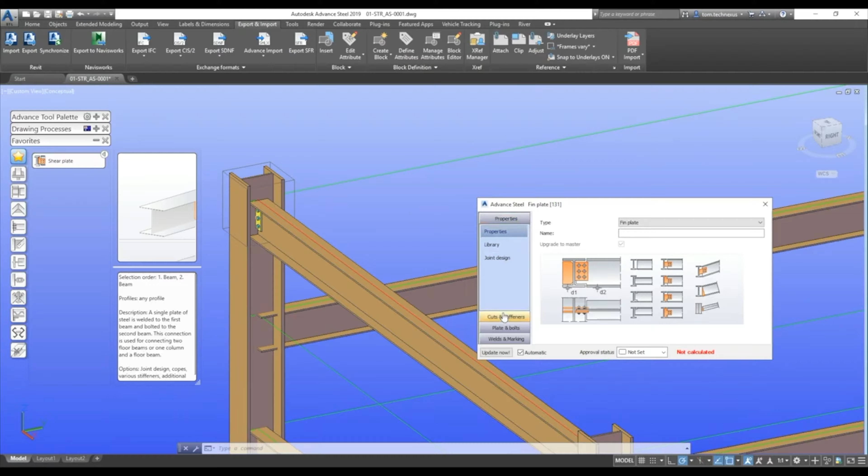Last week we went through the whole routine of uploading a Plant 3D project into the new Autodesk Construction Cloud, or ACC.

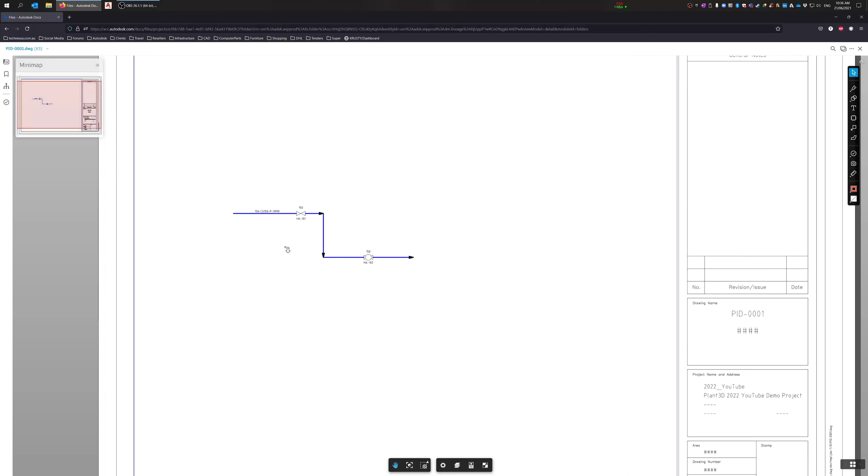I've mocked up a quick little P&ID, and I wanted to go through some of the markup and issue creation features here on ACC, and also the compare tool, up at the top right. All of these tools were available in BIM 360, and now with ACC the symbols have changed a little bit, and how things run have changed a bit as well. So I thought it might be a good idea to get into those.

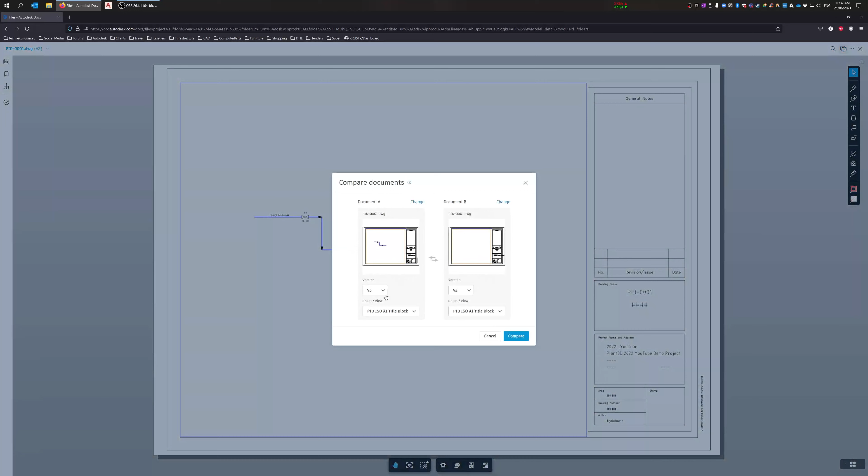So we're at V3 of this P&ID, and you can see I've just added a few bits and pieces. If I wanted to do a comparison of V3 against another version, I can come to the top right and click the Compare Documents button, and then we get V3 versus V2. We might do that within the sheet view.

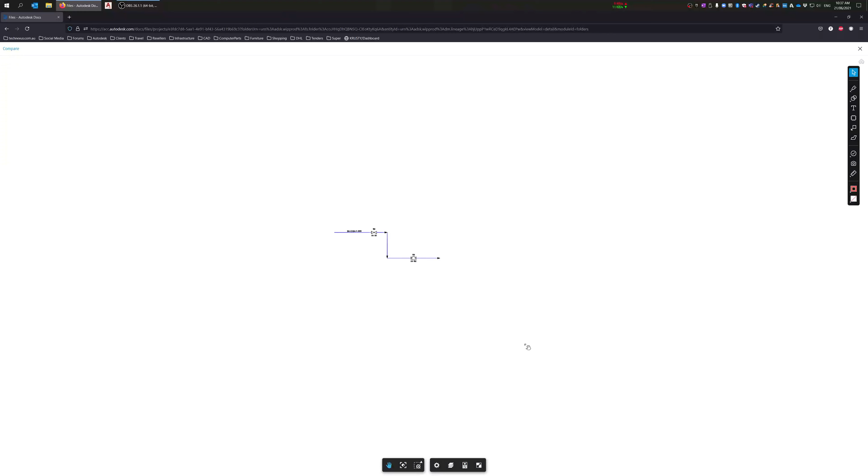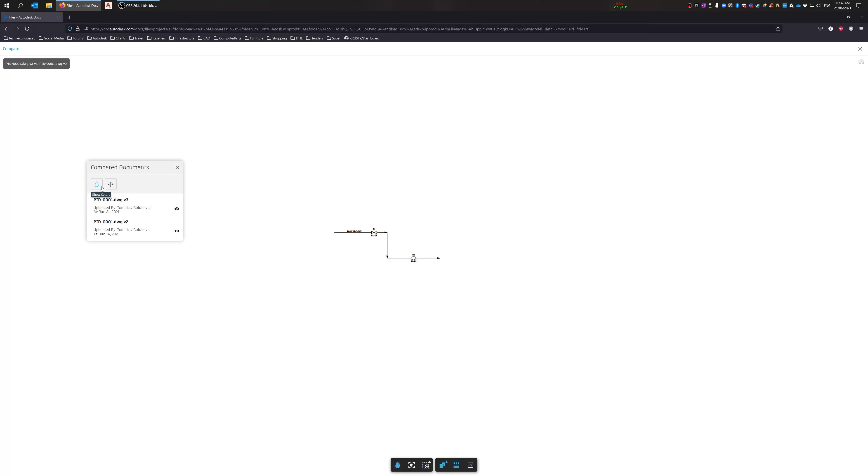It comes up and says that V3 has those lines drawn, and I can turn those on or off, and V2 doesn't have anything underneath either. I can also align, though there's probably nothing to align it against, but we've got hide colors, show colors, and alignment, so it'll compare V2 to V3 or V3 to V2, whichever way you want to call it. We've also got overlay, and side by side.

That gives you a slider bar to show V3 on the left and V2 on the right. This will be particularly handy if you're comparing files that have a lot more work in them. It's something we can go through over the coming weeks.

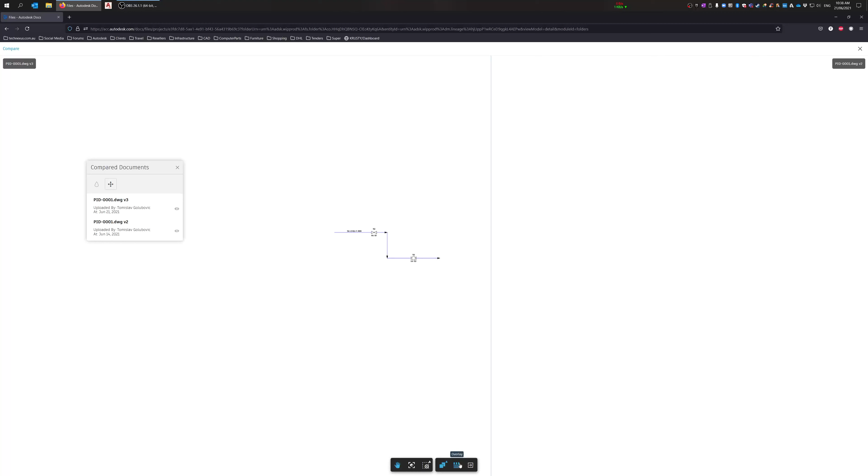I can add some more information to this P&ID and then show you that feature. And down the bottom we've got pan, fit to view, zoom window, or just zoom, side by side, overlay, close the panel, open the panel, and then exit that feature. So if you're doing a lot of day-to-day updates on these files, that compare feature might be good for you.

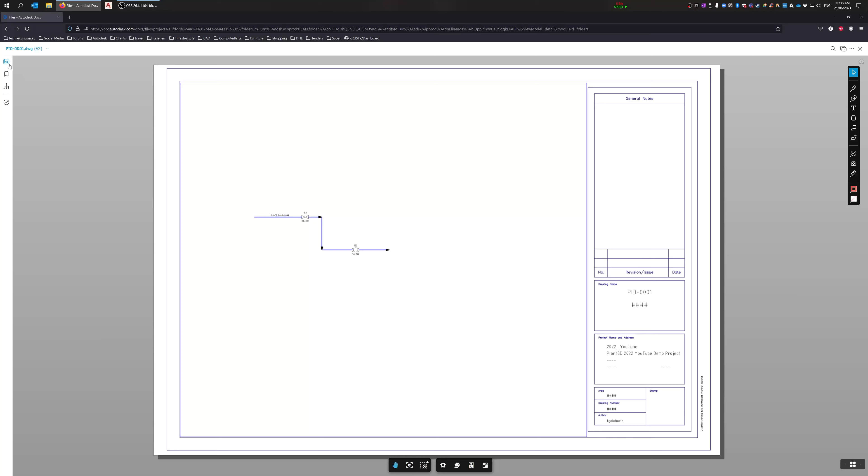Having a look down the right hand side here, you've got the selection tool, just to pick items. What I might do is jump into the actual model space, and then you can see what it is. If I pick that line there and go to properties, you can see that it is an SLine from Plant 3D or P&ID.

It's in CS150 spec, size 6-inch, and it's a primary line segment and new. It will be interesting to see - I haven't tried it yet - whether there's any custom properties come through here. We might do that in another exercise as well.

The pen mode - if I just start drafting something, I can come back later and edit it, and then get the border color, change the color, change the thickness of the line.

Links - it looks like we can only link files within the ACC project. It doesn't look like you can link hyperlinks, but you can link other files, so it could be handy.

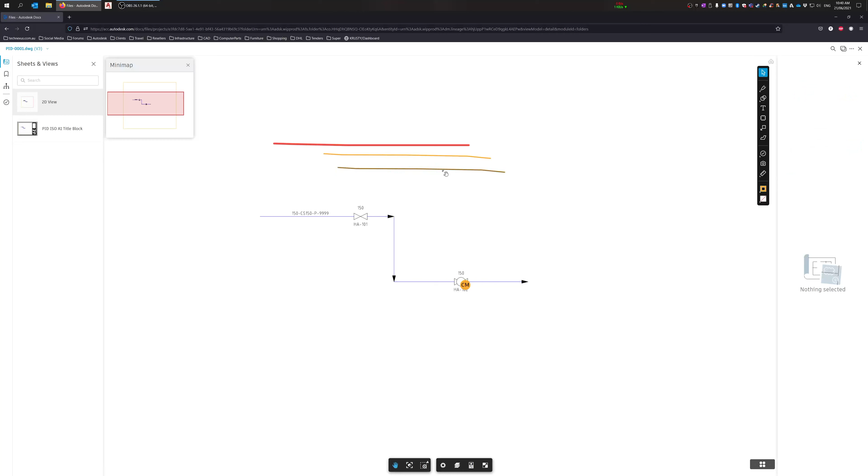What else have we got here? Nothing else, so I can copy it. I can publish it as a markup. For the time being it's unpublished, so no one else will see it, I'm assuming. If I had others on this project, it looks like they'd be able to see it. It looks like when I change from publish, it changes the color slightly as well.

If we want to get rid of those, I can just come up to the right hand side and delete those markups there as well. Same thing, I did an issue before, so we can just come up here and delete the issue.

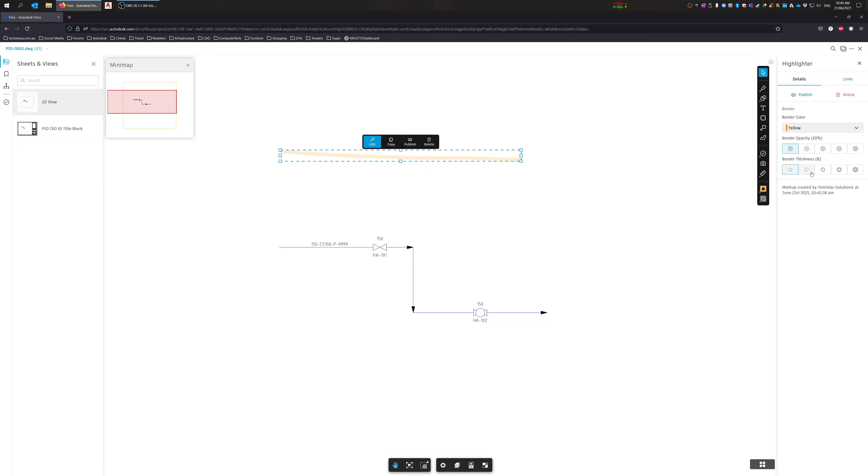We've also got highlighter mode, same deal as the pen. Doesn't look like there's much difference. We can come through and change the border thickness - it looks like it's a bit thicker as a highlighter, so the thin weight still looks quite thick. And then border color and opacity. So you've got pen and highlighters there.

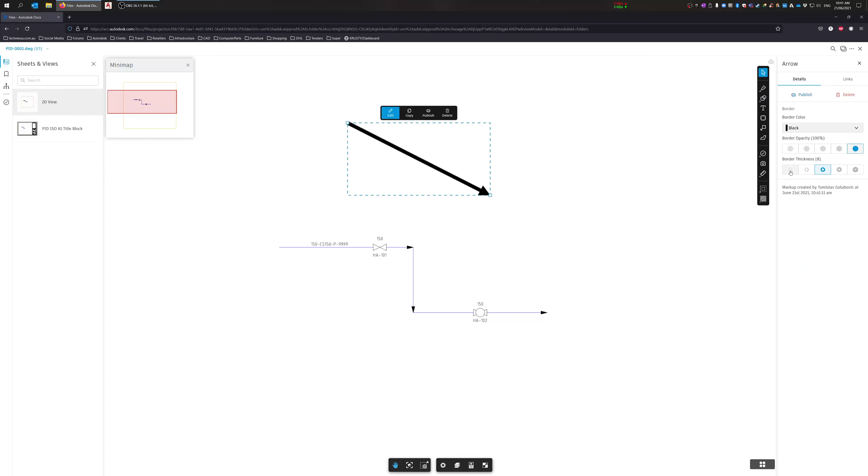Different shapes - we've got the arrowhead, going from the tail to the head itself, and you can adjust certain settings here. If you need to do just straight lines, circle, polygon, four-sided polygons, a square, and a cross.

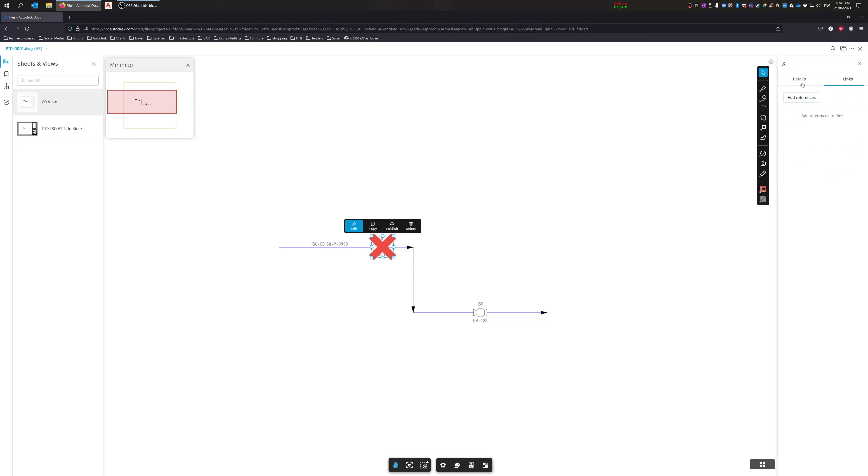So if you want to cross out that valve, we can come through and say it needs to be crossed out, and add any other links to it. So they're just shapes. Then we've got text - add text in draw, so here's your text, say 'remove gate valve'.

Change the font size to be a bit smaller, border color red.

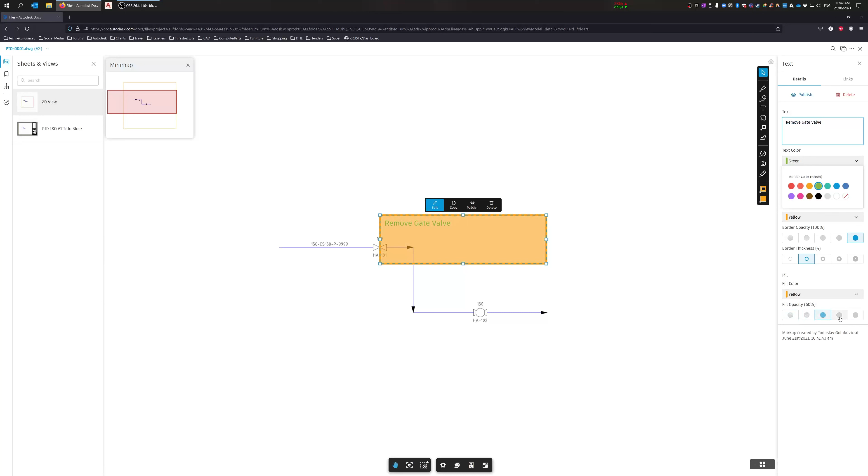Okay, so you've got text color in one color and then border color in another, border thickness, and any other fill colors as well. And the opacity: 20, 40, 60, 80, and 100.

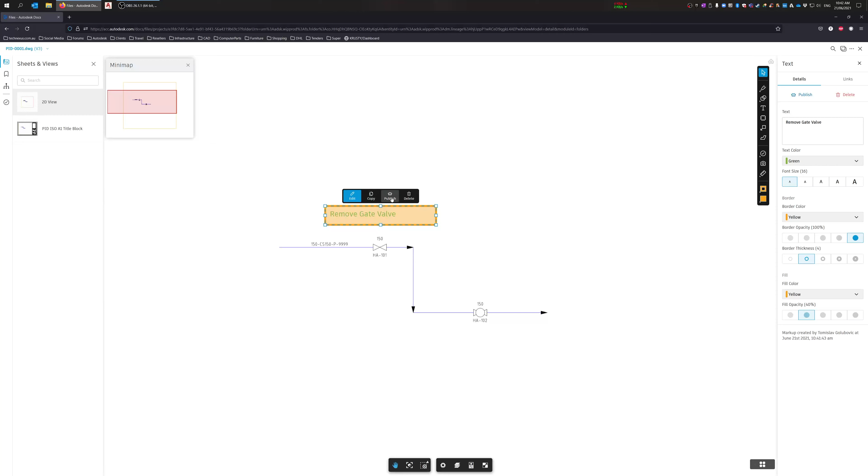So if it's something you want to do, you can come through and just throw in bits of text there. You can copy it as well, publish it, and delete it. So we'll delete that. Revision clouds, or markup clouds maybe.

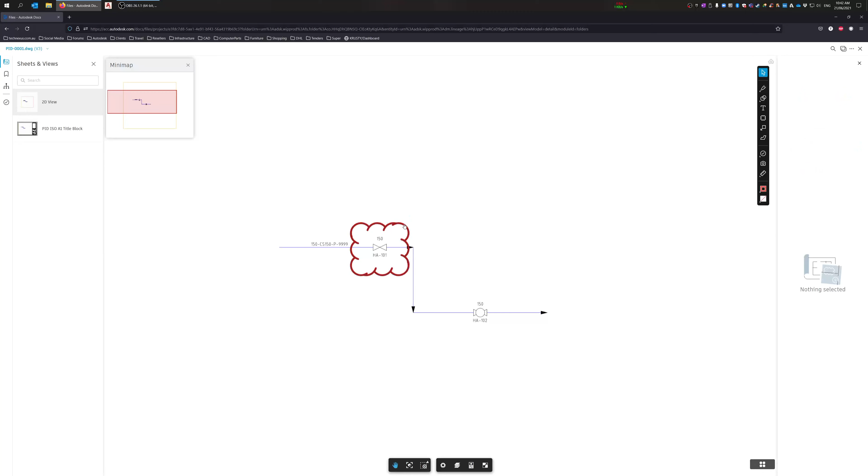So we'll just say no fill, and again copy it or publish it. So if it's published, I don't have anyone else on this project, but I'm assuming if it's published, it means that it's going to be seen by everyone on the project. We can come back and delete that as well.

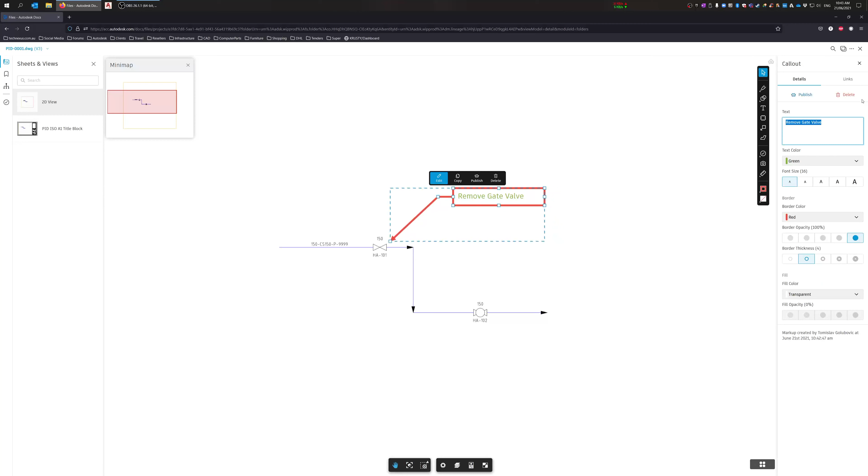So little sort of call outs, that way you have the arrowhead plus the box in there. So again, same thing, remove. Gate valve. Change the font size a little bit. Again, link it back to another file. Delete it.

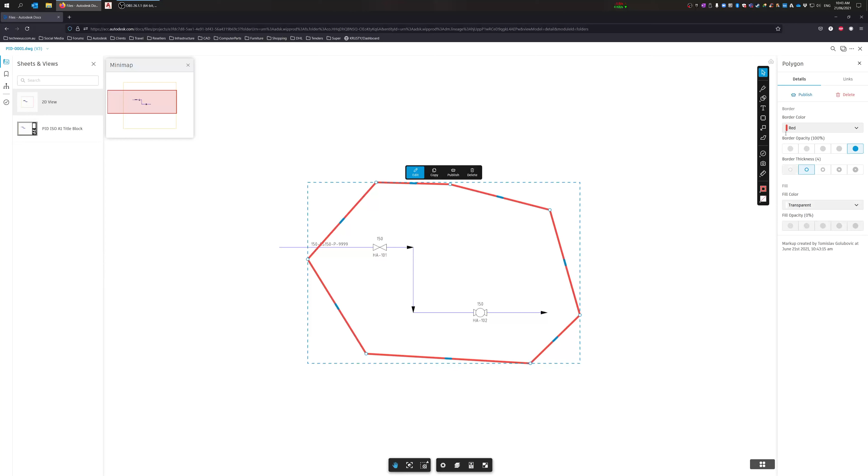Polyline polygon mode. So I guess maybe for highlighting sort of areas that you want to draw around, maybe it's something you don't need a square or a circle for. So very similar feature to the ones before.

Okay, so they're all the sort of the markup tools. Then we got the issues. So I might say this is a design issue on this ball valve. Status open, type.

So there's some predefined ones in there. We'll have to have a hunt around to see if we can customize those. The description, who it's assigned to, location, due date, start date. That's something new for ACC. I don't remember seeing that in BIM 360, so it needs to be started today, and it's due on Thursday. Whatever the root cause is, so design coordination, photos, files, RFIs or assets.

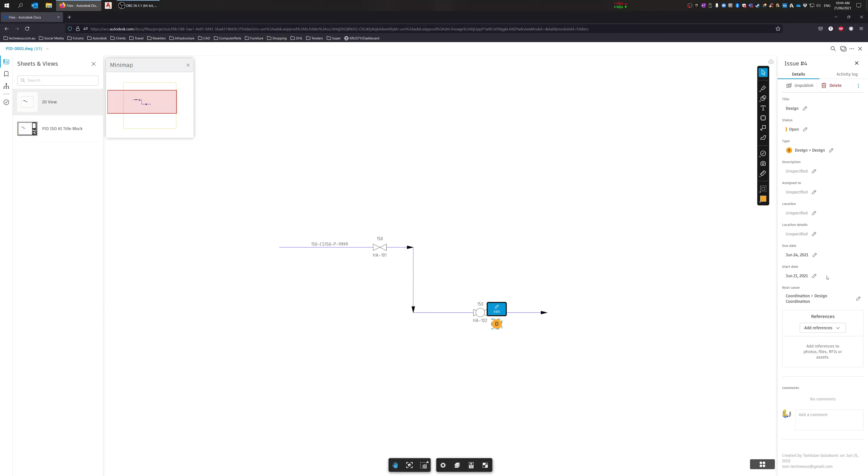Okay, and activity log just shows what was done and when. Okay, so I guess if you've got add references, you can link back to other files within your ACC project as well.

I'm just going to delete that because I'm not using it. And also, it looks like here, and I'm not exactly sure how this works because I get an error on this. So if you're watching this and you know what this button is doing, I think it looks like, I'm assuming it might be something for screenshots. But if you do know what it is for, please let me know in the comments section below. I am trying to chase it up myself to see what it is or does, but it doesn't look like it works for me at the moment, but we'll have to see what that is.

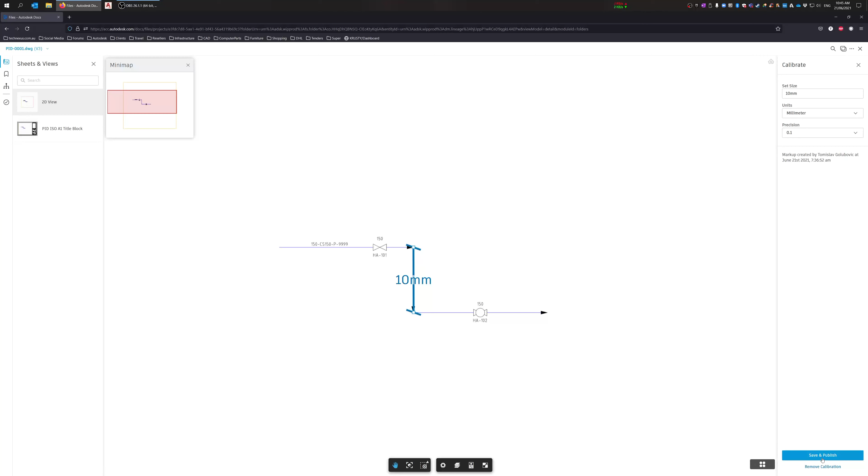Measuring tool, so you can calibrate. So I know that the gap between these is 10 millimeters. So now that I do any other measurements, so if I want to measure from here, so I've got 3 millimeters there. And as I drag those out, so I know that there is, what's that, approximately 20 millimeters from end to end across there.

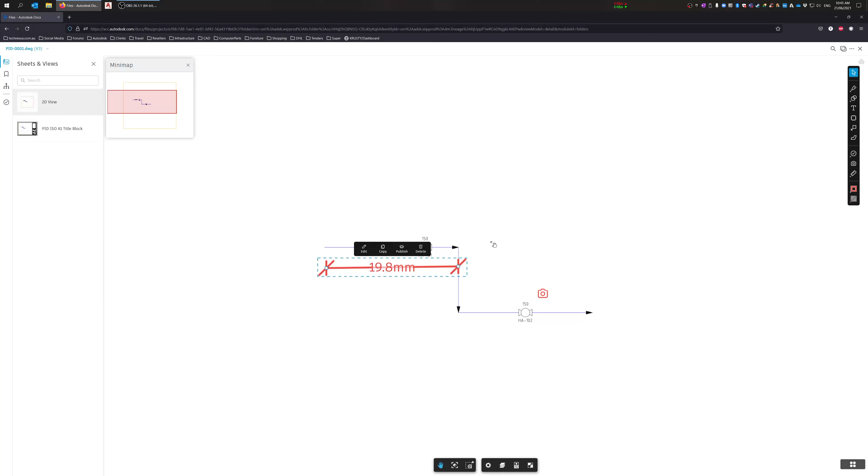So maybe not necessarily for P&IDs, but in the 3D sense, it could be handy for you to sort of measure between 2 points, maybe even on sort of 2D orthos. That way you can sort of measure and see what you want.

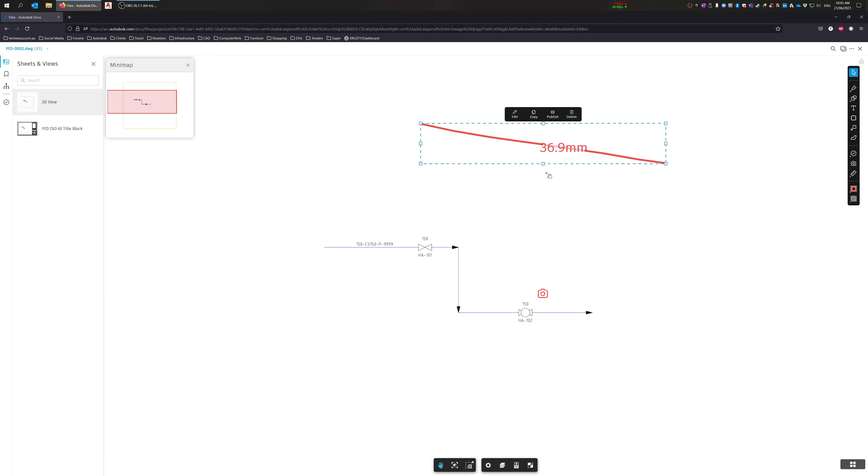So there is another one here for taking sort of like creating a line. Okay, so you can draw across two lines in any sort of direction, I guess. And then we can grab our measurement from there.

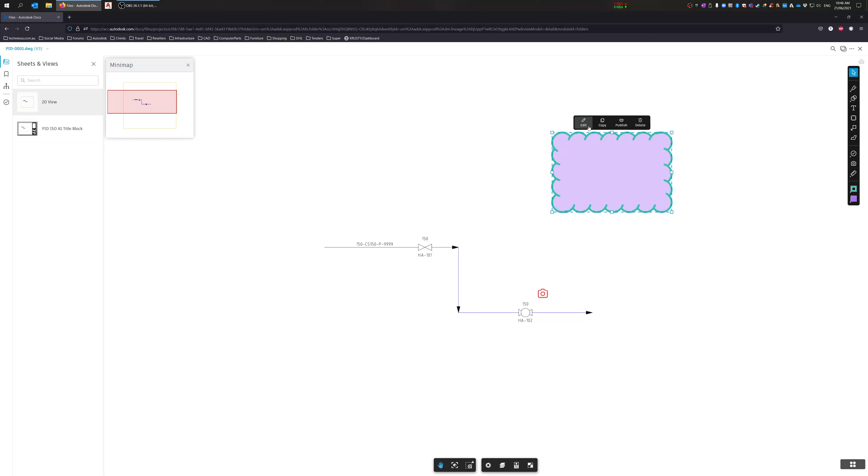And it looks like as well, so you've got area functionality. Okay, so if you're doing sort of maybe quantification, and you need to measure off drawings, then you could do it all in here. You've also got preset border colors and everything else down below, so you can edit and change those once you've drawn it. But if you wanted to predefine them, so if I wanted to change that sort of light blue color with a purple interior, then you can see that's already set up there. But you can also later come back and change that anyway from one color to another.

All right, so that's really all I wanted to cover today. Just some of the features on markups and issues.

But like I said, if you are watching this and you know how this camera function works, I am trying to get it to work, but I'm not exactly sure how it works, and I can't sort of find anything online about it. But please feel free to make a comment in the comment section below.